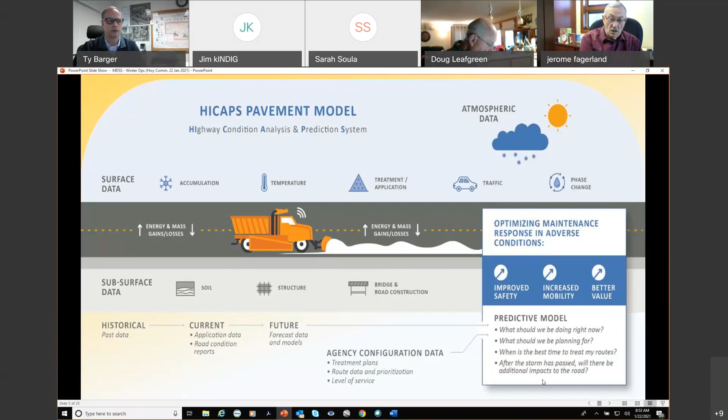MDSS utilizes what's called the HICAPS pavement model, and it draws inputs from many different sources that you can see depicted by the images on this screen here. The HICAPS pavement model includes atmospheric, surface, subsurface data, as well as historical, current, and forecasted weather. The HICAPS pavement model helps us to determine what we should be doing right now and what we should be planning for. And I'll give you a very brief overview of some of the features in MDSS.

What you're looking at right now is a screen grab from May 29th, 2019. So MDSS is not exclusively a winter maintenance tool, but it is something that we use extensively throughout the winter and all year round. So just to give you an idea of some of the graphical displays, in red I've highlighted some of the menu items that I'm going to be scrolling through here momentarily. Presently, you see the overlay depicting hourly precipitation. This is wet precipitation, of course, because the image was taken in the month of May, and the routes are lit up with road conditions. You can see the legend on the right here, so immediately you can assess the conditions of the roadway across the entire state of Nebraska.

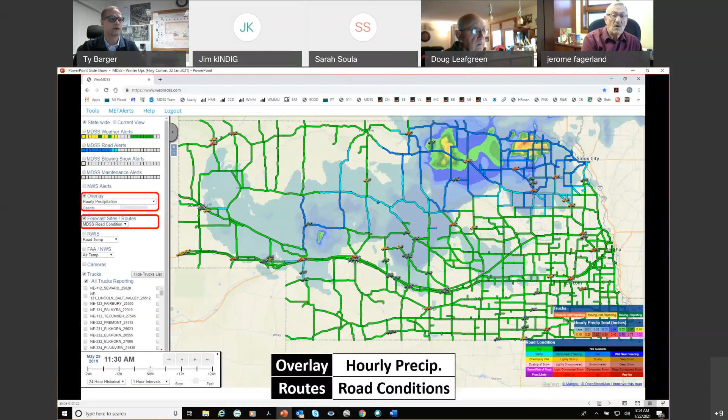Another tool that MDSS provides is what we call the heads-up display. This allows the user to see what they can anticipate graphically here at the top of the screen, and what the system is recommending that we do for maintenance activities along this timeline. And this is very specific and customized for every single route segment. So depending on which route segment you want to see, you'll see customized data in this display.

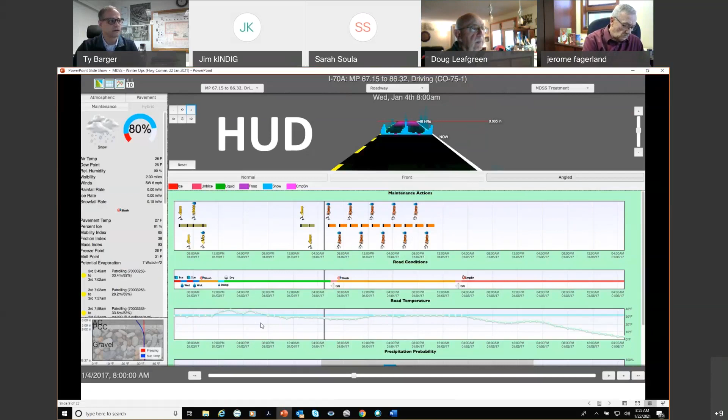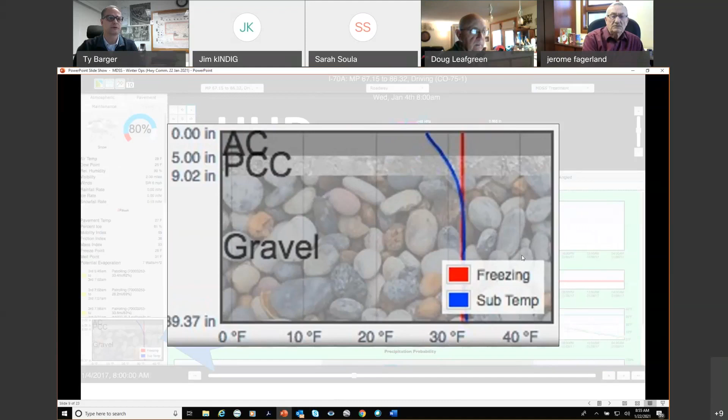And just another example of some of the kinds of information that you're able to get out of MDSS. So looking on the left margin of the screen, you see our pavement profile, which actually shows subsurface and surface temperatures throughout that route segment. So a great deal of very important information is being pulled together.

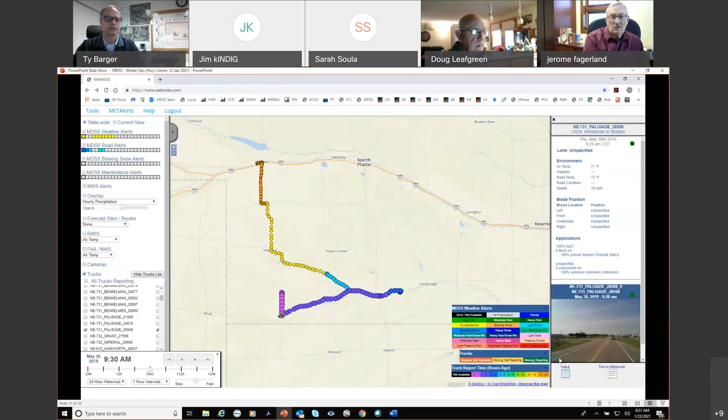As a supervisor, you can utilize MDSS to see where your equipment is, where it's going, where it's been. Here you can see a breadcrumb trail for a particular plow truck, one single plow truck. And again, this is another screen grab that I took some time ago. And if this was a live screen, you could hit this little table button right here and look at the exact same information in a different way as such.

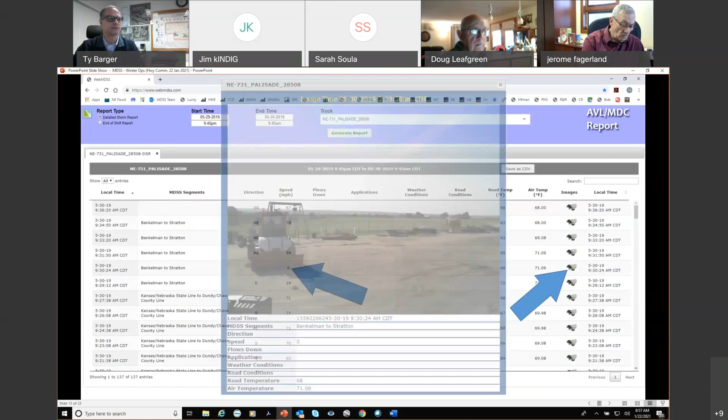And when you look at this information, you might wonder, why did my plow truck come to a halt at 9:30 in the morning? And you can find out very quickly by selecting the camera icon for that time slot. And you can see, well, my truck just pulled into the yard to grab something. But you can imagine how handy this tool is when doing something like a mishap investigation. You want to know exactly when that truck came to a halt and what it was seeing at the time immediately before and after that mishap.

And these are all dash cam images recorded from trucks, and you can see the value of this kind of information, not just to us, but also the traveling public.

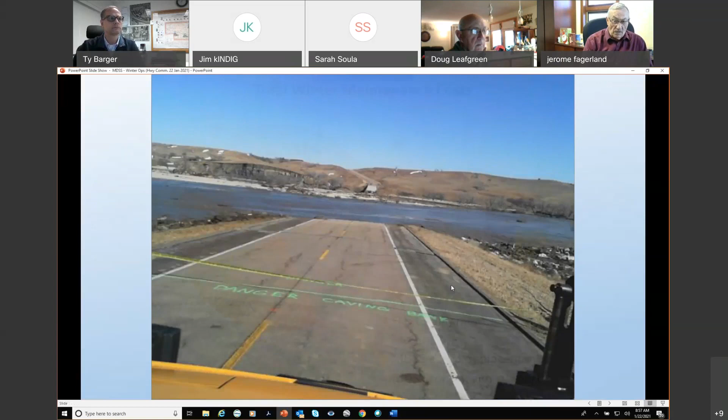And I'll offer to the group that I think that is a very smart investment, because the more you look at your data and let your people know that you're looking at the data, the more careful and thoughtful they are in consumption of their materials. And we see a great deal of benefit coming from this tool set.

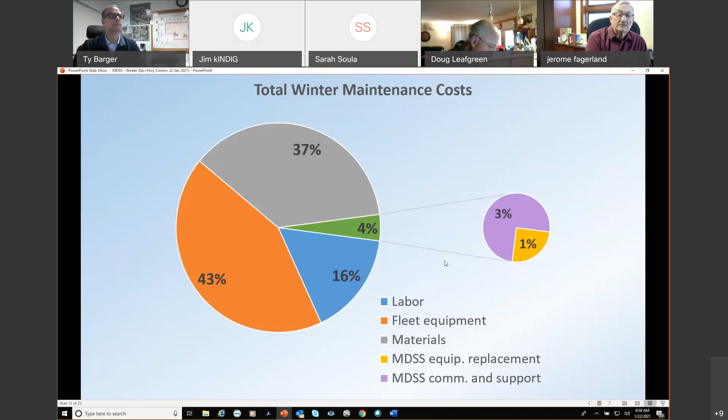A couple final thoughts on MDSS. We have a multitude of training videos that are available to staff so they can learn this. It's not a quick study. It's something that requires some practice and an upfront investment of time for our leadership to get proficient with the system and understand all the different values that it provides to our decision makers.

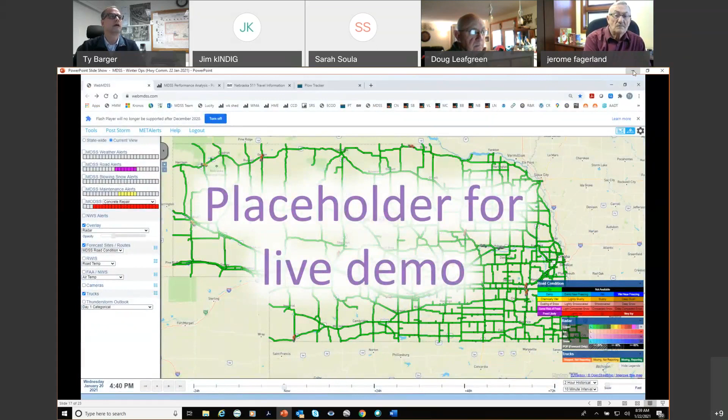Here's a placeholder for a live demo. And now what you see on the screen right now is an actual live version of MDSS. This is what's happening right now in the state. And I'll just leave this here and not go into any detail, except to show you that you can select on a specific route and get that detailed information that I was explaining a little bit ago.

Now I'm going to transition and talk about some different tools that MDSS provides us, some analysis tools. This is our MDSS performance analysis dashboard. So what you're seeing on the screen right now is, as of right now, this is the readiness of our fleet of equipment across the entire state. And you can drill down and find out very specifically where we need to focus our time and energy.

This is department-wide. Select on the next tab, you can look at individual equipment. Here's all 8 districts. I want to drill down a little bit. Let's take a look at District 4. And here are all the different yards in District 4 and their readiness by yard. You can look at a yard more specifically.

These are the 6 plow trucks that are assigned to the Kearney I-80 yard. And you can see of the 6 trucks, one of them is not reporting a spreader status presently. So as the supervisor at the Kearney I-80 yard, I now know where I need to focus my time and attention in order to get my equipment ready for the next storm.

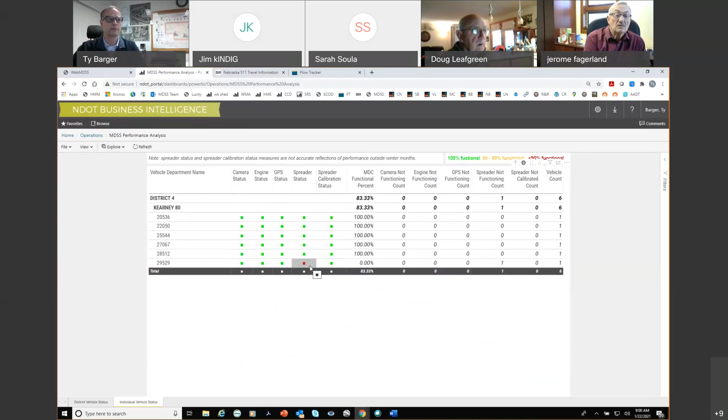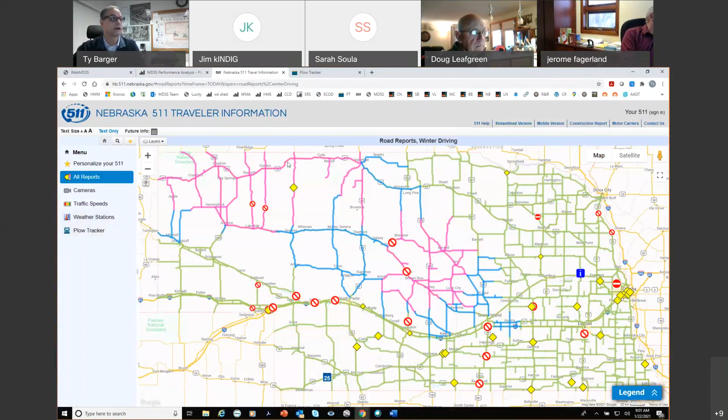I presume everybody is familiar with 511. This is a very popular application for the public and for everybody here in the department as well. One feature that we added recently was the plow tracker application, which I also have open. This shows where our plow trucks are in real time, but it does not show the trucks that are static or parked and been sitting idle.

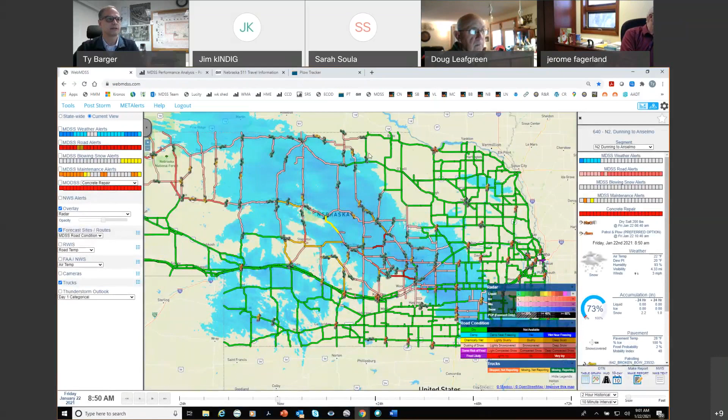So on this screen, you see far more trucks. This is the MDSS screen. And what the public sees are only the trucks that are on the move. And if you were to select on any one of these trucks, you can see exactly what that truck is saying. So in real time, the public can look and see what the condition of the roads are across the state.

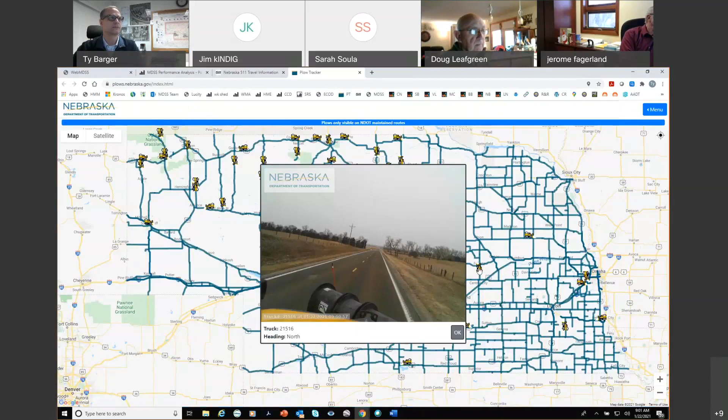Two final observations for MDSS. As I indicated before, there's a big investment of time here for the leadership, especially because it takes probably a good 8 to 16 hours of solid training on this in order to get an initial proficiency with the system. And the final observation is we must make this investment. The better informed our decisions are, the better we're going to provide services for the public. And we understand this, and this is going to continue to be a very great asset that's going to provide increased benefit the more we utilize it.

Now I'll move on to salt management. This is a term that I use very broadly to address all of our de-icer materials that we utilize in providing winter maintenance services. And another live demo queued up for you all. What we're looking at now is yet another dashboard that we have designed to help us manage our de-icing materials. Very, very important that we do so, because if we don't watch it carefully, the cost will climb very, very quickly.

So on this screen, you see lots of different commodities that are utilized across the state. In the top left, you have a specialty salt that a few of our districts really value a lot and get some good value out of. And this yellow graph represents all of our bulk salt, to include that specialty salt. And on the bottom left, you see who uses beet juice historically. District 3 has used a great deal of beet juice over the last several years.

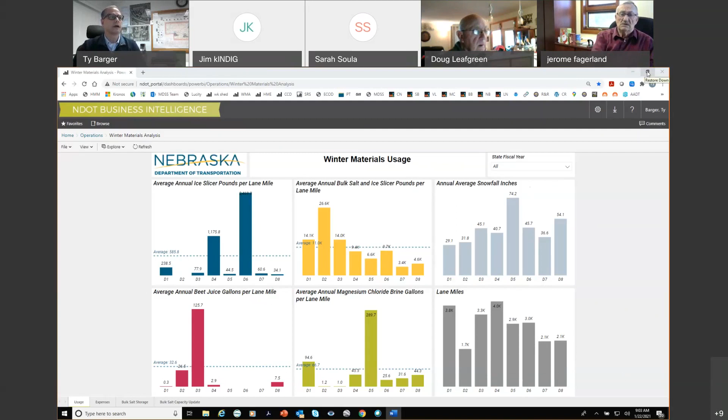And the green graph in the bottom middle here represents our magnesium chloride consumption across the state. On the right, you have the average snowfall by district, and on the bottom right, you have the lane miles by district. And I want to keep this graph open, and now what you have is two identical copies of the same chart. I'm going to explain why here in a moment, but on the left is the graph that I just got done explaining to you, and on the right is identical in every single way.

And at the bottom of this dashboard, you see different tabs for different functions. And I'm going to keep the one on the left on the usage, and the one on the right, I'm going to move to expenses so that you can refer back to the usage graph in a moment. So while on the left, we talk about consumption, on the right, we're talking about actual dollars out the door.

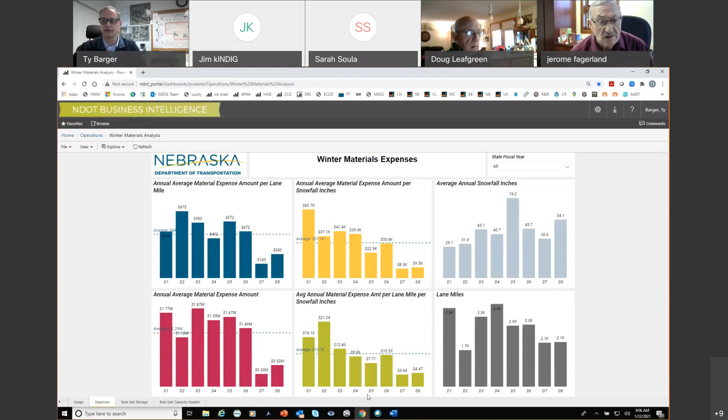And to understand that question and develop an answer, it's important to have both tabs open at the same time so you can see the correlation between the green graph on this page and the yellow graph on the usage page. And if you look at these two graphs, you can see there's a great deal of correlation between these two. And so one can reasonably conclude that salt consumption relates to overall economy of material usage.

And so if salt consumption is the reason why District 5 is able to provide their services for that amount of money, why then are they using less salt? And the answer is directly below this graph right here, I believe. Magnesium chloride usage. District 5 uses more magnesium chloride than the rest of the state combined. And the reason for that is quite simple.

All de-icers perform more poorly when it gets colder. The colder it gets, the poorer our de-icers perform. Now, different chemicals all perform in different ways. Sodium chloride, it bottoms out at about -6 degrees, and the closer you get to that, the poorer it performs. Magnesium chloride has a much lower threshold for performance. It can suppress freezing temperatures at much lower temperatures.

And so when it gets cold, District 5 is able to transition and incorporate magnesium chloride into their program to be able to melt ice more effectively than they would if all they had was sodium chloride. When all you have is sodium chloride and it gets really cold out, your only recourse is to pour more and more salt onto the highway, and that becomes very cost prohibitive when you don't have magnesium chloride to transition to.

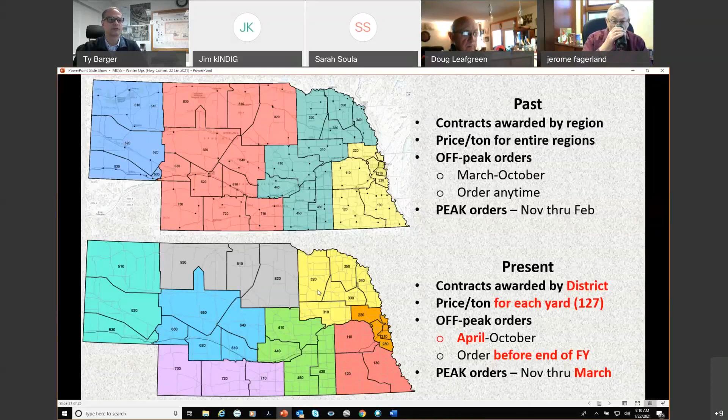And we've required our bidders to bid every single yard location specifically, and awarded to the lowest bidder for each district. But by requiring those bidders to bid each yard individually and not provide one price per district or one price for the entire region, we are now saving over $550,000 every year just by requiring our bidders to be more specific in their bid.

So now what you see on the screen is all the information that I've covered this morning, and I will be available for any questions. And I have with me Dale Ping, our fleet manager, should anybody have any questions or concerns about our equipment. Are there any questions from the commissioners?

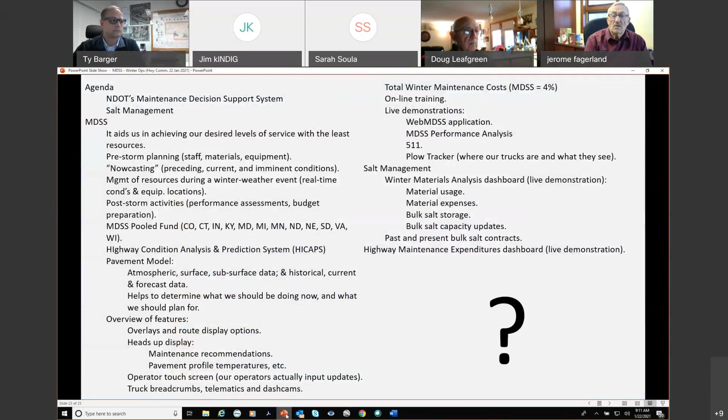Well, Ty, thank you a lot. It's very interesting, technology at its best. Yes, we're quite proud of it. Thank you. Yeah, I enjoyed the presentation immensely. So, well, if there's no more questions, Jim? Jim, yes, this is Mo. Can I jump in? Sure.

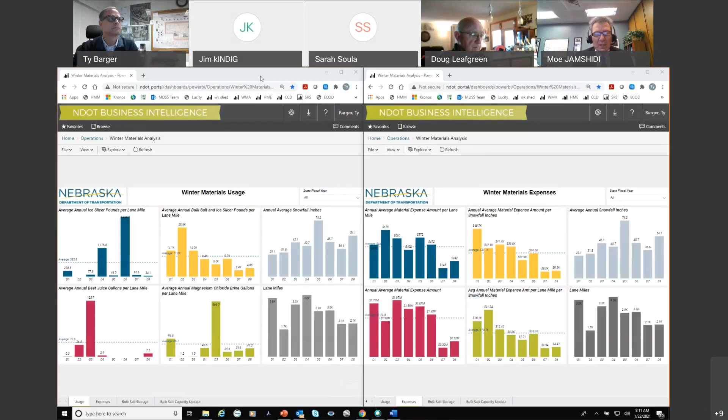First of all, I want to also thank Ty for the presentation. He's doing a great job since he's come to us a few years ago. And to also tell you, when you look at all of this technology that we have deployed across the state, it also will point to our challenges trying to get the right people recruited that can run this sophisticated equipment. And our snow fighters out in the state, they've stepped up and they've learned and they've gone through many classes. It's not easy for people to jump behind a vehicle of this.

I've done it. If you ever do it in the middle of the winter, you'll see these folks are running the computer. It's almost like flying a jet anymore. You just want to sit there and be quiet and don't get involved, because they really are sophisticated, and all of this equipment basically does two things: more safety of our drivers and the traveling public, as well as savings. So every ounce of salt or whatever equipment we use is well thought out. It's not just dumped out of the back of the truck. It's well measured for the conditions.

So again, thank you, Ty. Well done. And I want to plug all the DOMs, district operating managers, who are really the drivers of these. And I know the district engineers are demanding it, where everybody is ready to go every winter. And as a team, I think we've come a long ways. Thank you, Mo.

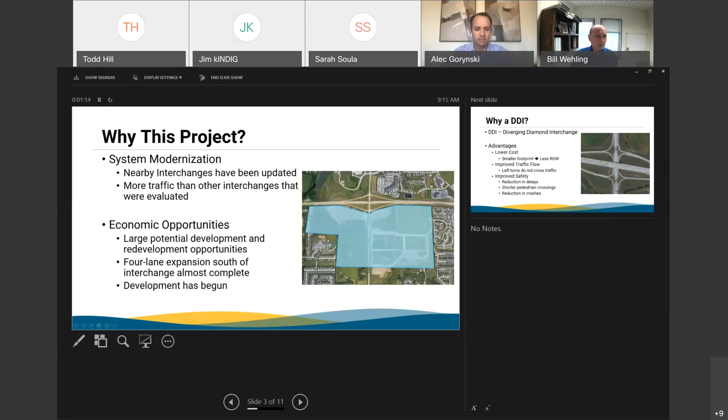Sorry to interrupt you. There's a gray box covering the presentation. I don't know, Sarah, if you can. Hey, Bill, you're on. Do you have both screens up? It went away. Yeah. Okay. Can you flip screens? Hold on here. Sorry to interrupt you, Bill. No, it's okay. I need to share the right screen. It sounds like I've got the wrong screen shared. Hold on here. See if I can go back. Let me try to stop sharing and then see if I can get the presentation to go again. All righty. Because it sounded like it wasn't doing the actual presentation. It was actually showing just the slideshow.

There we go. Looks good. Okay, does that look better? Yep. Okay, thank you. Appreciate that. All right, so apologize, I'll start over on this one.

The project was identified in the Metro Area Travel Improvement Study, or MTIS as it's known to others. MTIS is a collaboration between NDOT and the Metropolitan Area Planning Agency. MTIS provides a comprehensive study that recognizes the future interstate and freeway system needs in the Omaha area. This is the first of a number of projects related to MTIS that will be presented to the Highway Commission over the next few years. The project is also identified as part of the next 10 years of the Build Nebraska Act.

So why was this interchange one of the projects that was part of MTIS and BNA? First reason is system modernization. Both the 204th Street and 180th Street interchanges have been updated to handle increased traffic. This interchange was originally designed to serve rural traffic, but today it has more than 68,000 vehicles travel through it per day. This was the most traffic compared to other West Dodge Road interchanges that were studied in 2016 as part of the Build Nebraska Act.

There's also plans for development around this area with Methodist Hospital in the Northeast Quadrant and a number of other existing businesses in the area as well. During a January 2016 public outreach effort, stakeholders in the area presented NDOT with development opportunities that were estimated between $200 million to $600 million. City of Omaha has almost completed a 4-lane expansion project south of the interchange to handle additional traffic through the area. And as shown on the picture to the right, a developer has already begun developing the area south of the interchange with a couple of buildings already under construction.

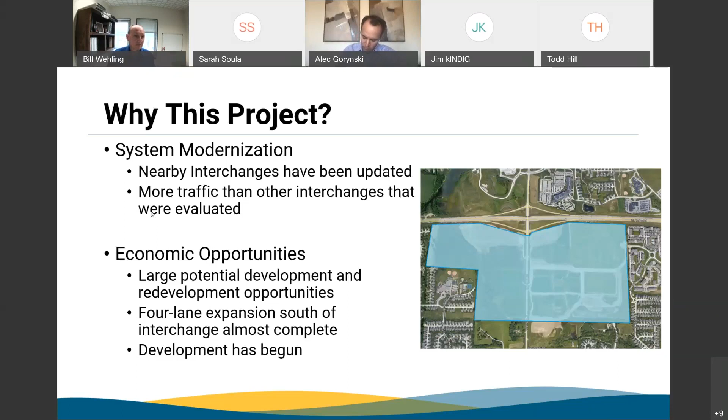Advantages of a DDI include lower costs since it is a smaller footprint than most interchanges and would require less right-of-way. Also, in most cases, the crossover area can be constructed within the existing footprint on or below the existing structure, reducing the overall cost as well. Flow of traffic is improved since left turns do not have to cross traffic, which also eliminates the need for additional signal phasing since left turn signals are not required. Reduction in signal phases also reduces delays.

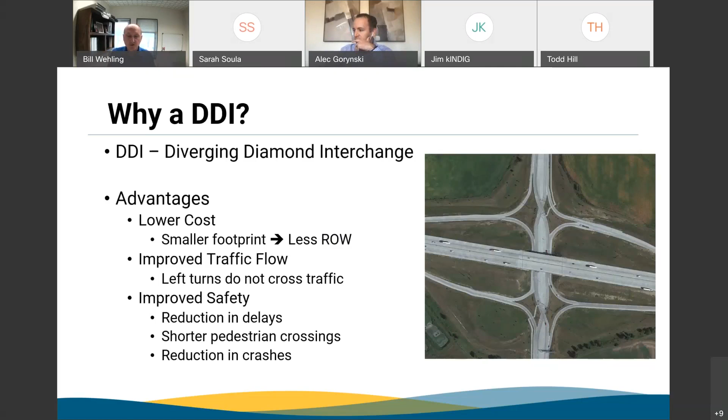Besides reducing delays, other safety benefits include shorter pedestrian crossings, fewer conflict points, which means fewer opportunities for collisions, resulting in a reduction of crashes. 1 year after Missouri DOT constructed the country's first DDI in Springfield, they compared the number of crashes over the past year with the number of crashes of the previous 5 years with the old interchange configuration. They found a 46% total reduction in crashes, right angle crashes were reduced by 72%, and left turn crashes were totally eliminated.

NDOT advertised a request for qualifications or RFQ in October of 2019. A number of proposals were received, and in December of 2019, Kirkham Michael and Associates was selected to provide design services for the project, with SRF Consulting and Wilson and Company providing sub-consultant services. Notice to proceed was given to Kirkham Michael in June of 2020. The project is split into a conceptual design phase and a preliminary final design phase.

As I mentioned, phase one is the conceptual design phase. The goal of this phase is to verify if the DDI is the right option at this location. The key tasks of the phase are shown here. The traffic study results will be used to assist with conceptual design and if the DDI can fit within the constraints of the existing structure, thus eliminating the need for rebuilding the overpass on 6.

The traffic study collected data in 2020, but due to the effect of the COVID-19 pandemic, data that was obtained from a traffic study done by a developer in 2016 with data verified by the City of Omaha in 2017 were utilized as well to develop our final traffic model. NDOT reviewed the final traffic model with our consultant and the City of Omaha, and we are confident that the data is correct.

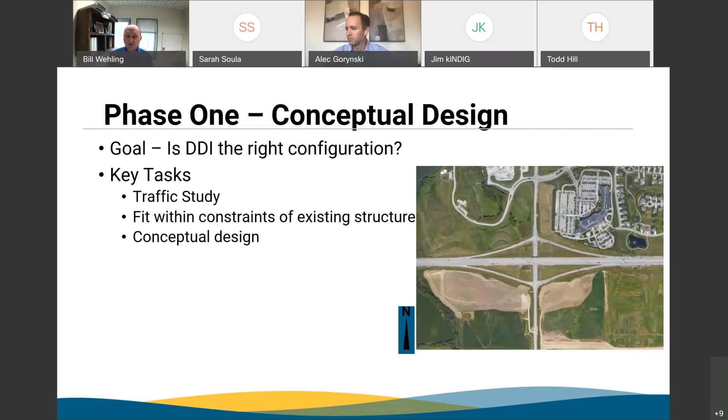Once we complete the conceptual design phase, we'll move on to the preliminary and final design phase. The goal of this phase is to develop plans to be let for construction. The key tasks of this phase will be preliminary design, right-of-way, all our NEPA tasks, final design, and plans preparation. Current schedule for the project shows a planned turn-in in the spring of 2023 with a tentative letting in the fall of 2023 and 2 years of construction to follow.

Now, before showing a couple slides on the early conceptual design, I'd like to talk a little bit about public involvement. Communication is essential with all of our projects at NDOT, and even more so with a project of this scale. There are a number of stakeholders involved, and we need to make sure that they are aware of our plan. In phase one, we've had a number of meetings with the consultants, City of Omaha and MAPA.

During phase 2, we plan to have a number of meetings, including the plan in hand and other public involvement meetings, possibly a public hearing, as well as additional stakeholder meetings. Now, finally, this slide shows the early conceptual design here. I'd like to point out the sidewalk, because we talked a little bit about the sidewalk.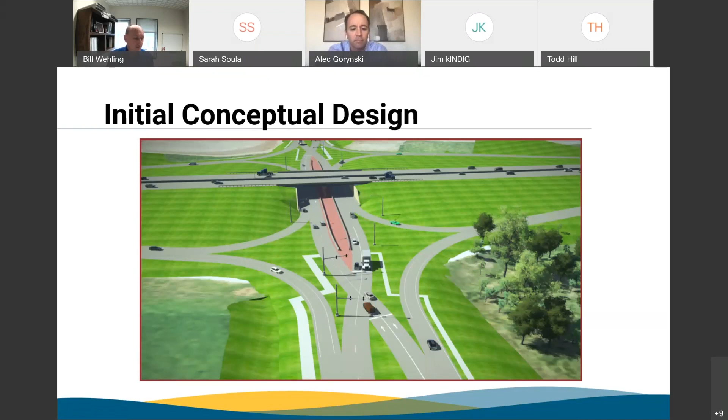Thanks, Bill. This is Alec from District 2. The median there, will it be clearly designated as a place for pedestrians to walk, or will they just kind of be expected to know that that's okay for them to use? It is designated for them to walk there. It will be, as you can see, you've got the bridge structure there with the pier in there, and we'll have it so it's basically the two directions that they can go, and it'll be marked that way as well.

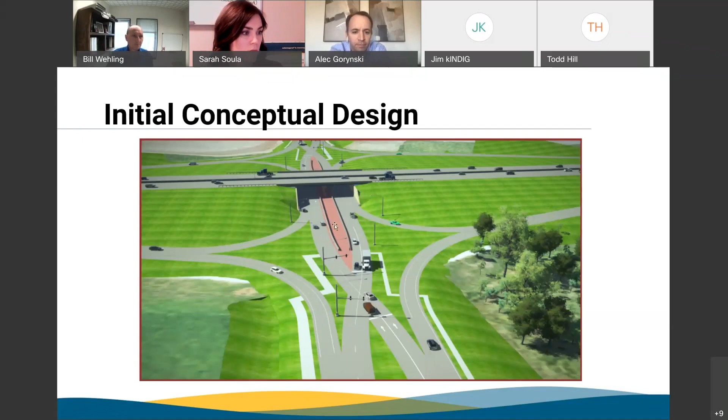Thank you. You're welcome. Okay, Bill, thank you a lot. We appreciate that. Are there any other questions from the commissioners? If not, now we'll go to Todd with the US 75 corridor study.

All right, I appreciate that. Thank you, Jim. For those of you who don't know who I am, my name is Todd Hill. I am the project studies and survey engineer for the department. Today, I'm going to be providing a very brief update as to the status of the Northeast Omaha US 75 corridor study that we've been working with on MAPA.

I should probably wait until Sarah catches up, but it's only brief because we haven't gotten to the point where we've gotten a consultant on board yet to kind of help start this effort. We have had numerous conversations and meetings, so in the near future, 6 to 12 months, hope to be able to provide you a more complete update. If you want to jump to the next slide, Sarah.

So before getting into the details of what this study will be focusing on, I thought it'd be ideal to provide a little bit of background on the US 75 corridor, specifically in the Florence area in Northeast Omaha. This is not the first time that this stretch of US 75 has been analyzed. As far as I know, the most recent study completed was back in the late 90s, conducted by HDR for MAPA. And the intent of that study was to look into making the direct connection between I-680 to the north to Eppley Airfield a little bit more efficient.

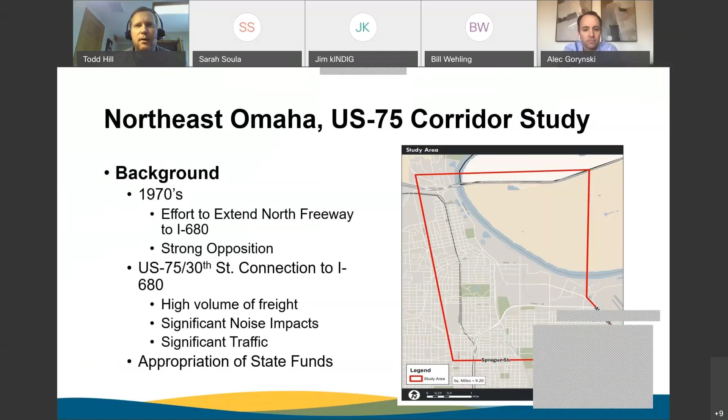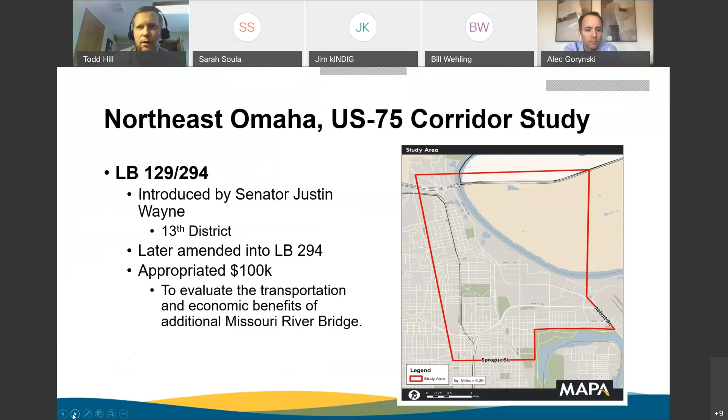These concerns prompted the Nebraska State Legislature to allocate funding towards the development of feasible solutions in the area. That was back in 2019. If you want to jump to the next slide, Sarah. LB 129 was a bill introduced by Senator Justin Wayne of the 13th District that would appropriate funding to conduct a feasibility study to evaluate potential transportation and economic development benefits of constructing an additional Missouri River bridge crossing. This bill was later amended into LB 294, but it did appropriate $100,000 of state funds towards this effort. Next slide, Sarah.

Last February, MAPA hosted a stakeholder meeting that included representatives from NDOT, Iowa DOT, both cities of Omaha and Council Bluffs, a whole slew of individuals that we all thought would have a vested interest in this effort. The intent was to discuss the upcoming project and get their inputs as to what the perceived issues are in the area and some of the history, and help take their input to figure out what the intended outputs and goals of a study would be, and the process we would need to follow to get to that desired outcome.

In my mind, probably one of the biggest takeaways from that effort was the realization that this study could not just focus exclusively on a new Missouri River Bridge crossing. The reasoning behind that was due to some of the concerns about whether or not the Iowa side of the river was even feasible to develop. As it currently stands, there is no flood protection, and you can see it in the map on the screen. It's the tan color within our study area.

It's not protected currently, and so it floods quite frequently whenever the Corps of Engineers increases output at Gavins Point Dam. The other concern, and I can't remember if it came from Council Bluffs or Pottawattamie County, but there were significant concerns about whether or not it'd be even feasible to get the necessary infrastructure in that area to allow for that area to even develop.

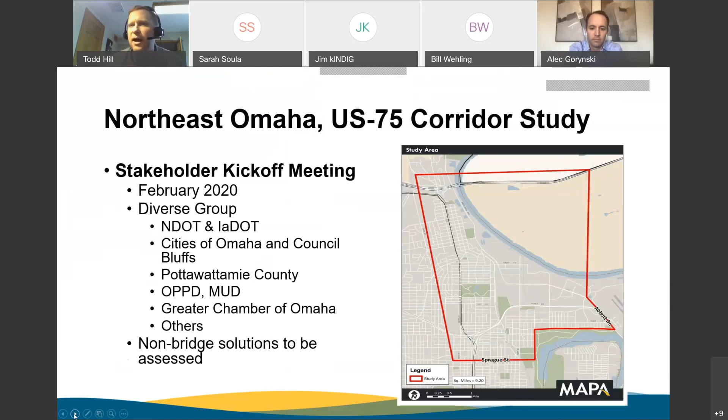As a result, the study will still analyze a Missouri River crossing alternative, but it'll also include additional potential solutions that will focus on realigning US 75 through Florence, and or the possibility of rerouting US 75 onto other corridors within the study area, or a combination of the two. Next slide.

After the meeting, after additional conversations with MAPA, it was agreed upon that the first step in this study will be to identify what that transportation need is in the study area before even really considering the economic component or opportunities. So essentially the study is going to be broken down into two phases.

Phase one will be essentially the engineering component, where we'll be conducting traffic and safety analysis, project out traffic growth, and then hopefully, assuming that we have the necessary funds, complete an origin and destination study, which will hopefully paint the picture as to where vehicles are coming from and where they're going throughout the study area, all with the intent of identifying what the transportation needs are currently, as well as into the future as we project that traffic out either 20 or 30 years.

Once that need has been established, at that point, then we'll develop a broad range of alternatives with the intent of hoping to dwindle those down to a handful of solutions that kind of stand out amongst the rest. Once we have those, phase two would likely start, and the intent of phase two then is to assess what the economic opportunities are in the area for each respective feasible alternative.

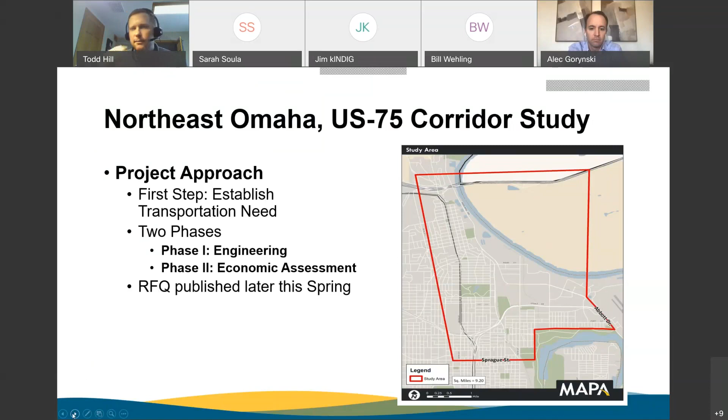Once the federal aid MAPA intends on utilizing, in conjunction with the $100,000 that has been provided, once those federal funds have been obligated, the RFQ will be published on MAPA's website. At this time, we hope that will go out in the next few months, at some point in the spring. That's all I have. The next slide, Sarah. If there's any questions, I'd love to answer them.

Nope. Evidently, no questions. Thank you, Todd. We appreciate that. Great presentation. I want to thank Todd and Bill and Ty for the contributions today. They were great presentations and eye-opening.

At this time, it's time for our public input. Sarah, are there any letters for the record? I haven't received any letters. I'm going to check if anybody on the call wants to participate in the public input section. You should have a hand icon. If you raise your hand, I can unmute your line. Okay. Not seeing any. Nobody from the public? Okay.

Well, I guess remarks from the chair and also the rest of the commission. One thing that this brings to mind is something I heard years ago when I was a kid: progress is our most important product. That was a company slogan. You know, that's kind of what this meeting was all about. A lot of progress going on, and it's pretty exciting. So, is there anybody who would like to add anything? Any remarks? Maybe I'm getting ahead of myself, Sarah. Guess not. Well, if not, Sarah, you want to give us the public meetings calendar?